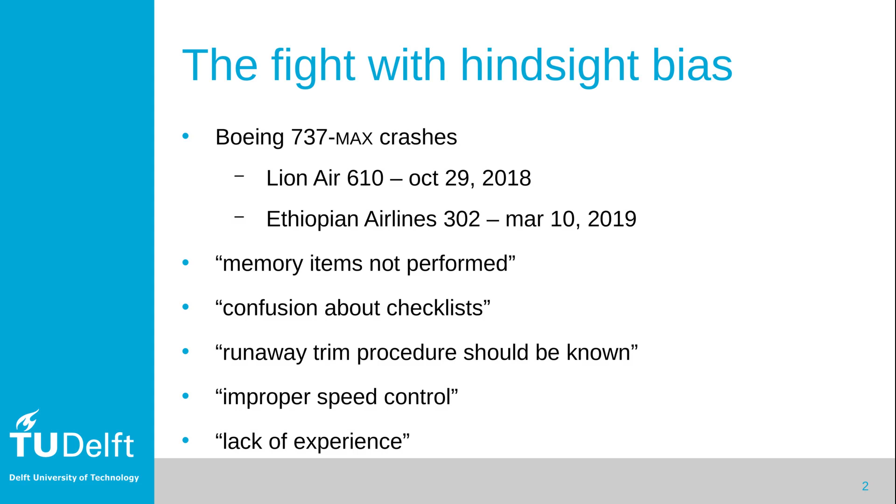By now, investigation into the first of these crashes has been concluded, resulting in many recommendations and modifications, while the 737 MAX was grounded until it could be recertified to fly. The main trigger in the crash of Lion Air Flight 610 was a signal from a faulty angle of attack sensor. This sensor indicated a high angle of attack on the captain's side, while the sensor on the co-pilot side was functioning normally. Early in the flight, this led to several events.

A speed disagree message, a difference in the indicated altitude between the captain's and the co-pilot's instruments, a difference in indicated airspeed, an airspeed low message, an indication of excessive airspeed on the captain's instruments, and the activation of the stick shaker that normally indicates a stall. In short, a whole slew of problems.

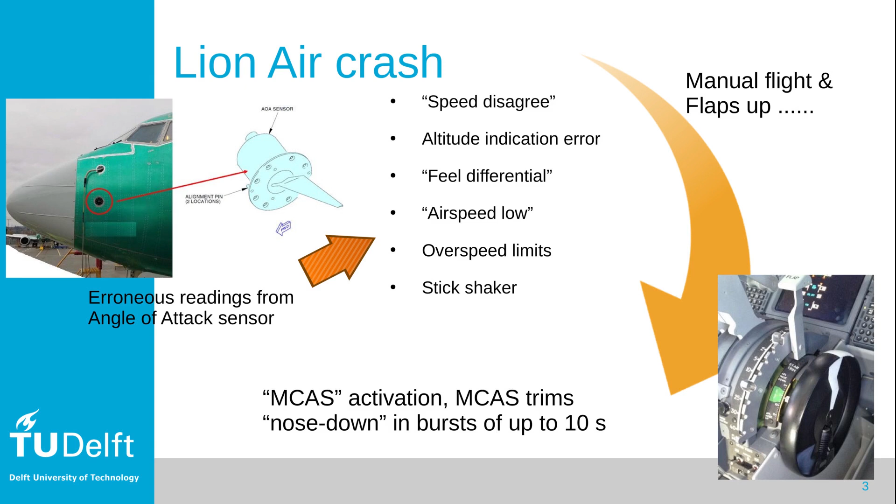A little later in the climb, the takeoff flaps were set to 0, while the captain was hand flying the aircraft. At that point, the MCAS system activated, sending nose-down trim commands to the trim system of the horizontal stabilizer. The MCAS system is the Maneuvering Characteristics Augmentation System. It was added to the 737 MAX design when it became clear that the large engines installed well forward of the wing had the potential to pitch the aircraft nose up at high angles of attack.

The system uses the input of an angle of attack sensor and produces a nose-down trim action by sending a 10-second nose-down trim command to the trim motor, which changes the angle of the horizontal tailplane. The effect will be that the airplane pitches its nose down. MCAS is only active in manual flight and when the flaps are up. That is why it did not activate right after the start.

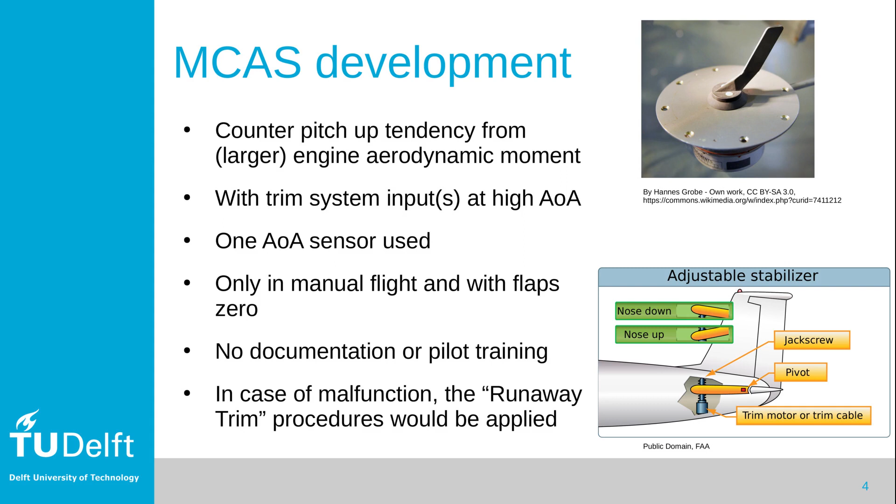The pilot training for the 737 MAX did not include information on this system. Boeing designers had assumed that the runaway stabilizer or runaway trim procedure, which was in the checklists of all 737 models, would enable pilots to cope with a malfunctioning MCAS system. So, if Boeing assumes that MCAS failure can be handled as a runaway trim, let's see what that is.

Back in 1984, as a young trainee, I was asked to analyze video recordings from test flights with the Swearingen Metro at the Dutch National Aerospace Laboratory, NLR. There were several runaway trim incidents in this footage. After a pilot used the trim switches, the electric trim motor would not stop, but continue running. It was caused by crappy switches that don't properly release. On my videos, pilots handled this with ease, swiftly identifying the problem and using a circuit breaker to cut the power to the trim motor.

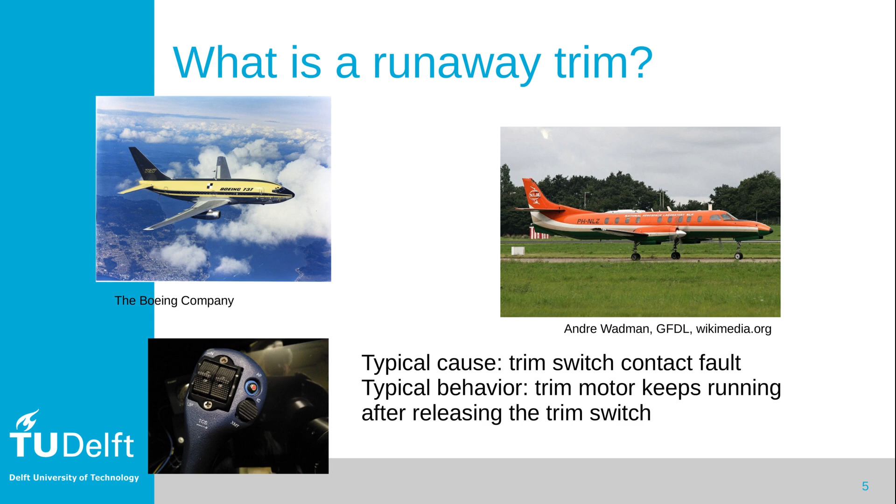This type of trim runaway was still an issue when the 737 was first introduced, back in 1967. However, more reliable technology means that nowadays a classical trim runaway on a modern airliner is very rare. Here is the runaway stabilizer checklist that should support pilots in stopping a runaway trim or a rogue MCAS system. Pilots need to know these actions by heart.

But once this work has been done, flying becomes a lot more work because hand trimming a B737 is tricky. The thing to note is the condition for starting this checklist: continuous uncommanded stabilizer trim. This matches the original faulty trim switches. It does not match MCAS, which produces trim in bursts, and in this case in a direction opposite to what might be expected with a stuck trim switch.

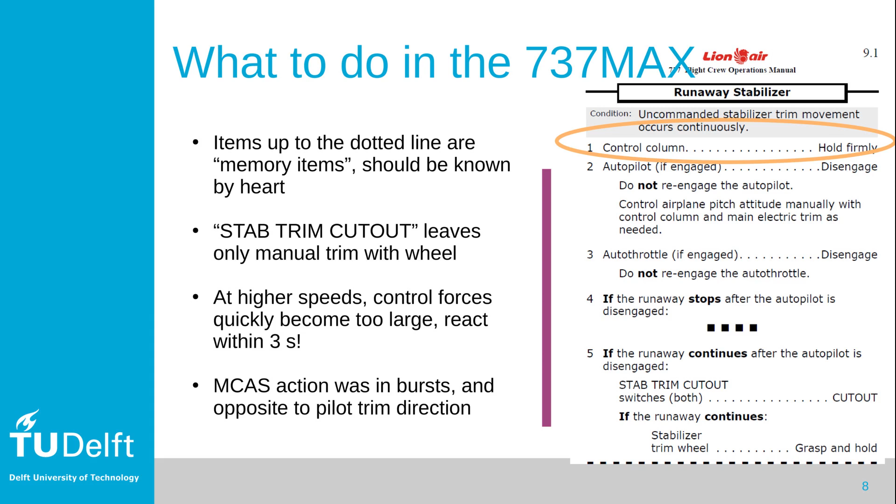In addition, there is Boeing's speed trim system installed since the 737-300, which always and automatically helps in keeping the aircraft trimmed. It also produces trim bursts, not unlike MCAS does, only under slightly different conditions. Reaction to erroneous MCAS activation needs to be swift.

In his book Thinking Fast and Slow, Kahneman describes different mechanisms in the human brain. Fast thinking with instinctive, associative, immediate reactions versus more laborious reasoning. Danish researcher Jens Rasmussen distinguished 3 levels of human behavior: skill, rule, and knowledge-based behavior. In his works, he uses various diagrams to illustrate that split. This is one of the simplest.

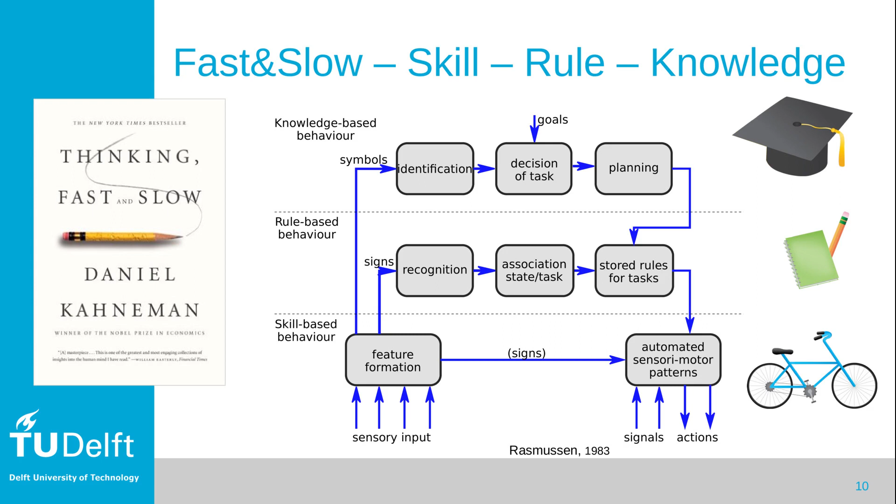When I asked my students for examples of these levels of behavior, they would maybe come up with riding a bike, performing a checklist, and writing their thesis. That is correct, but their answers typically focus on the observable action side of things. Here at the bottom left in Rasmussen's diagram is a feature formation block, which provides the input for rule-based and knowledge-based behavior, essentially starting Kahneman's fast and slow thinking.

Rasmussen labels these information paths with sign and symbol, and the block is placed squarely at the skill level. This is the function that enables humans to detect events or features from the barrage of sensory input. It produces our knowledge on the world. For example, in symbols, that the fuel tank is indicating a certain level. That means, for action, it's a sign that it's time to find the gas station.

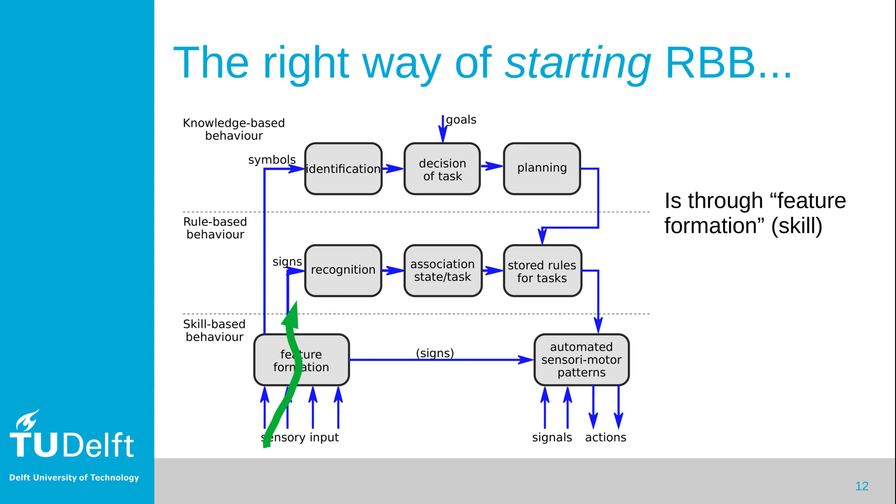This feature formation is a skill. It must be trained as such, by practice with situations that produce the actual or at least sufficiently representative sensory input. Studying with a book or an electronic tablet allows a pilot to memorize the checklist and reproduce it on a test, but it does not train the feature formation.

In this case, with the MCAS activation pattern being new and hidden in a mountain of other sensory input, and without experiencing this in training, pilots in the accident scenarios fail to make the connection to the runaway stabilizer checklist in time. In other words, their sign didn't arrive. Pilots in the Lion Air crash did not use the cutout switches, and in the Ethiopian Airlines crash used them at a moment when the airplane was already severely out of trim.

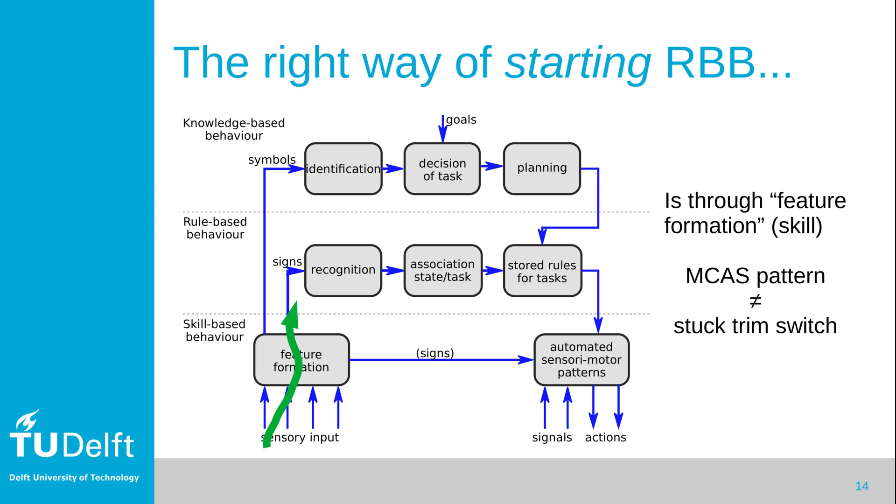Boeing designers were probably correct in assuming that the items on the runaway stabilizer checklist enable pilots to handle erroneous MCAS activation. However, they did not foresee that pilots would not be likely to have the feature formation skill necessary for recognizing the trigger condition.

Rasmussen's model emphasizes that skill is not only the capability to perform action, but also the capability to extract meaning from sensory input, which is an aspect of skill that we tend to take for granted. Like other types of skill, it cannot be trained by studying, only by hands-on experience. And note that the importance of feature formation skill is only going to increase as we have more advanced automation.

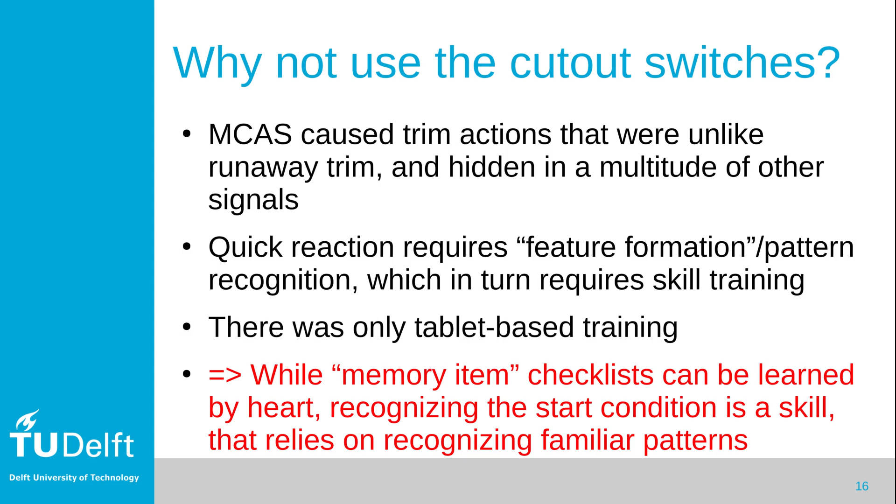As mentioned in the introduction, this is not a drastic new insight on the MCAS accident, but hopefully it sheds some light on how even experienced pilots can fail to initiate the proper checklist actions. The main message is that we must not forget that there is skill involved in extracting the right meaning from sensory input. The skill requires training, similar to learning to ride a bike, with lots of trial and error and relevant conditions, and for this case preferably in a good simulator.

We as designers tend to overlook this skill and assume it magically happens. However, anytime you foresee that an immediate reaction will be required from flight crew or operators, in other contexts, we should make sure that people can train the skill to detect the start condition for this reaction. Do not assume that people under time pressure can put together the pieces cognitively by reasoning and thus with slow thinking. Give them an opportunity to refer to previous experience.